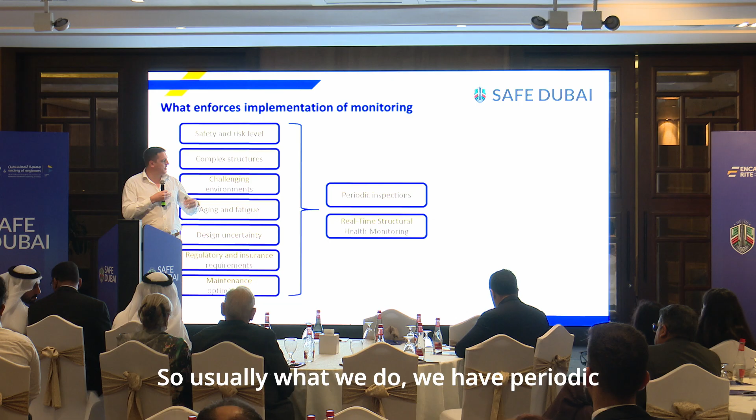So usually what we do: we have periodic inspection and we have structural health monitoring. Periodic inspection is when we send an inspector, an expert goes there, checks how the building is, and makes a conclusion. Structural health monitoring is when we monitor through all of today's technology and create a massive quantity of data. Now, what is the positive and negative side of all of this?

When it comes to periodic inspection, where we send engineers to see what's going on, the problem is that it's just a snapshot in the lifetime of a building. It's just one moment that we recorded. We do not know what happens with the building the rest of the time.

Second, we rely on the knowledge of the inspector, his skills, his ability to say okay, there is something wrong. For example, I don't know if you followed the case in Italy - in 2018 there was a bridge that collapsed. It had only been inspected 2 months before that, and was found fine. It wasn't.

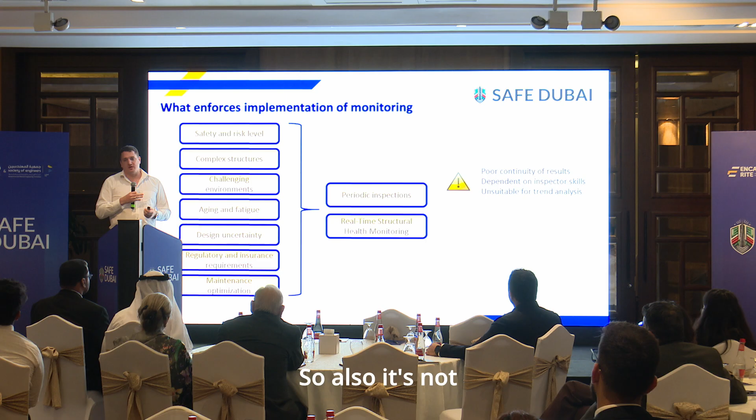Also, it's not suitable for trend analysis. You don't see how the building trends if you only have inspectors visiting from time to time.

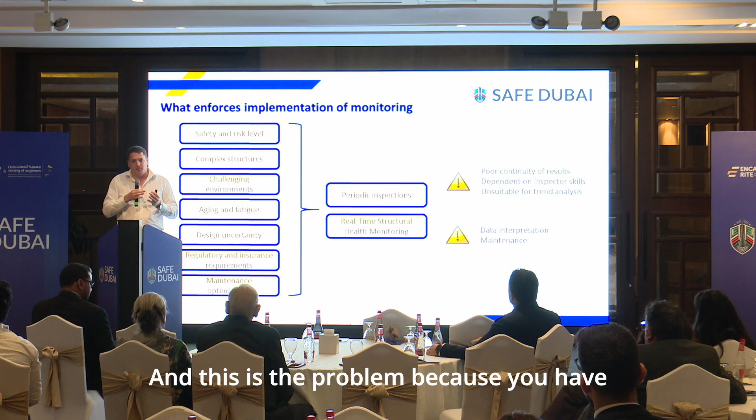On the other side, structural health monitoring has the issue of data interpretation, because opposite to periodic inspection, technology bombards you with information, a huge amount of information. And this is the problem, because you have to use other tools now to make sense out of this information. Also, maintenance, which with technology progress is now a reducing concern - we can say the maintenance is minimal.

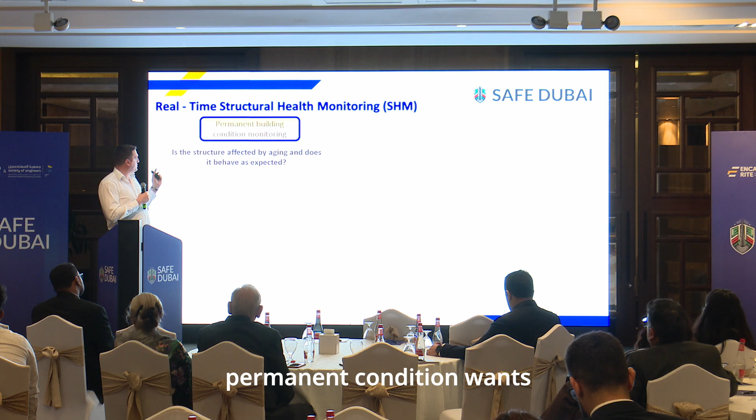So the monitoring of the permanent condition, building in permanent condition, wants to answer a question: is the structure affected by aging, and does it behave as expected? And that's what we usually use monitoring for.

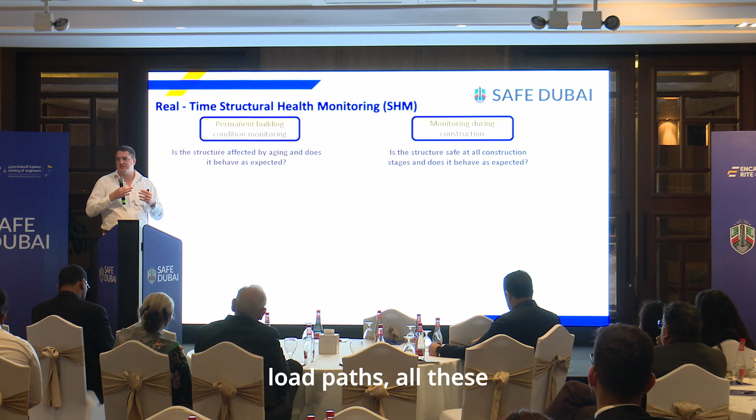But a less known use of monitoring is during construction, which aims to answer: is the structure safe at all construction stages, and does it behave as expected? This is way more complicated than monitoring the structure in a final stage, because a structure in final stage has only one behavior. During construction, it changes shapes, load paths, all these static systems, and so on.

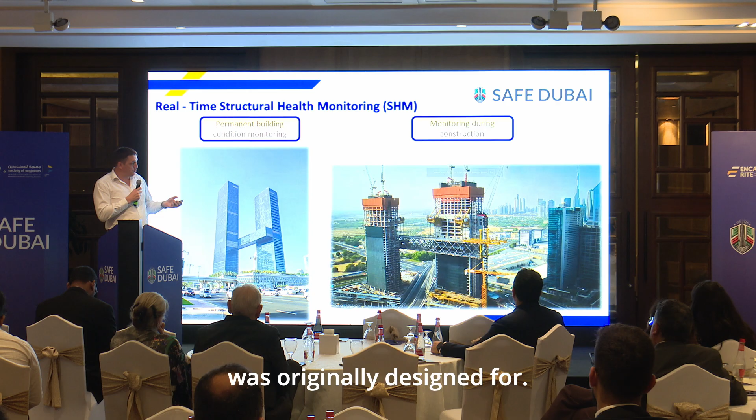All of that is completely different than whatever this building was originally designed for. And in order to make sure that in every stage of construction this building is actually safe, we need to monitor this building, and we need to know that it's behaving the way we actually want it to behave.

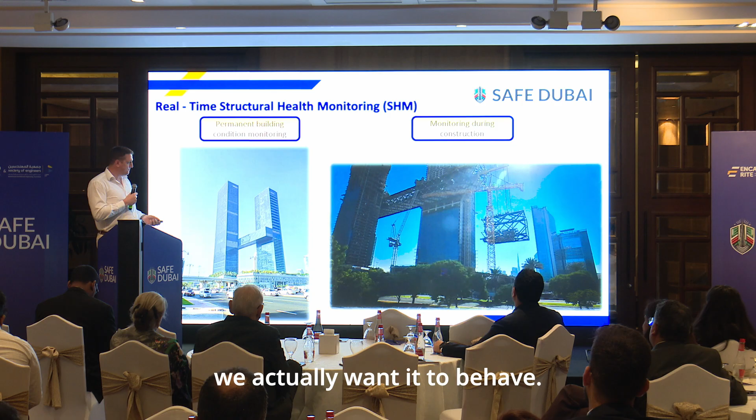Now, to give you a little bit of context, we need to get really into the specifics of this project. So One Za'abeel is located in the Za'abeel area, and it's practically surrounded by very important buildings in Dubai, including the palace in the proximity.

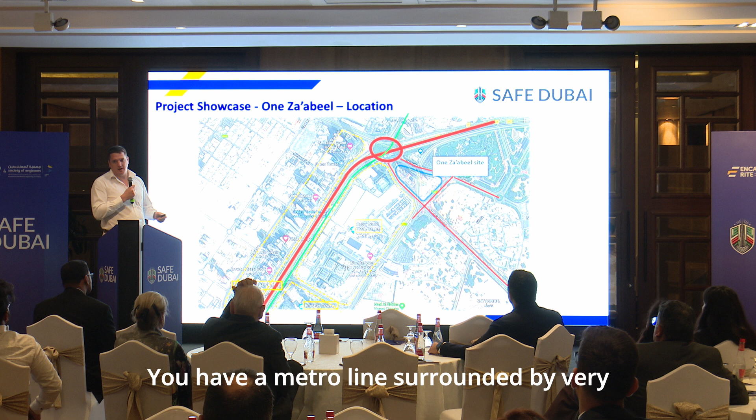When it comes to infrastructure, we have a main highway roundabout that takes, as of 2020 information, 650,000 cars a day. You have a metro line surrounded by very important streets, but the worst thing is it has a highway going through it. And this highway has to be operational throughout the construction period.

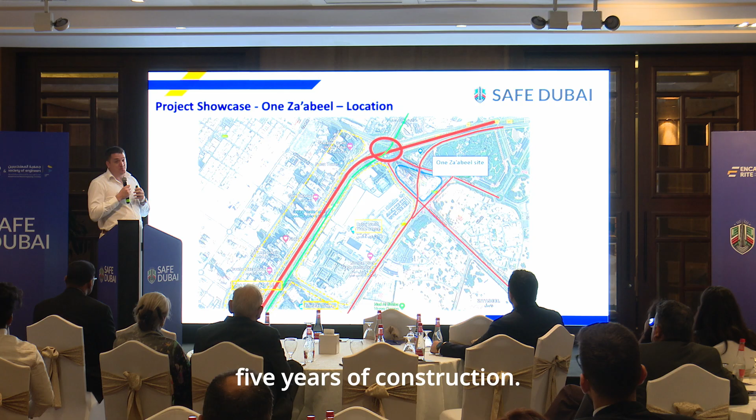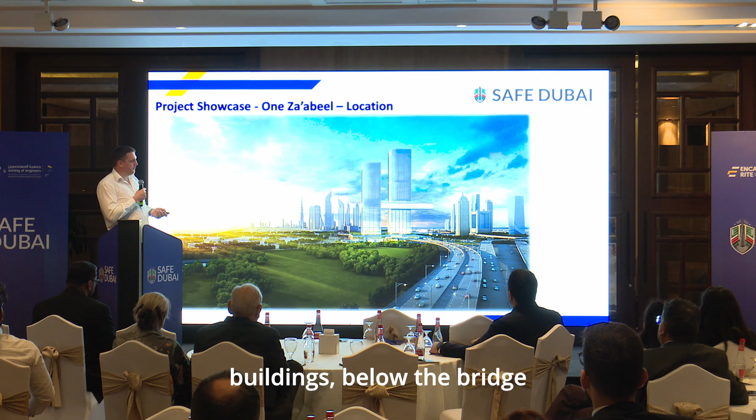In fact, the traffic on that highway was interrupted only for 3 days out of 5 years of construction. And that's a major achievement. Now you can see here that the highway goes in between the buildings, below the bridge that was lifted. So, a very, very challenging project.

Just to give you a feeling, Tower A is 300 meters, Tower B is 235 meters. The bridge is 225 meters. So the bridge is essentially another tower, just built horizontally. And the bridge's final weight is nearly 10,000 tons of only steel structure.

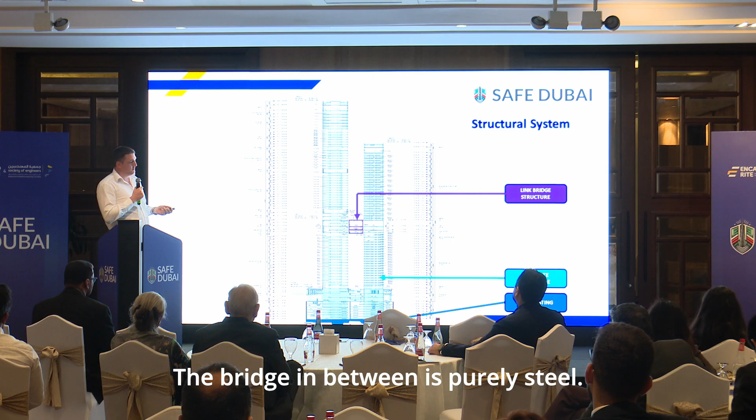No concrete, no facade, nothing, just the steel. So why is the structure so complex? I can show you here. We have a massive raft at the bottom, 3.8 meters thick down to 2.8 meters thick. The towers, obviously, and the podiums are made of concrete. But the bridge in between is purely steel, and very heavy steel.

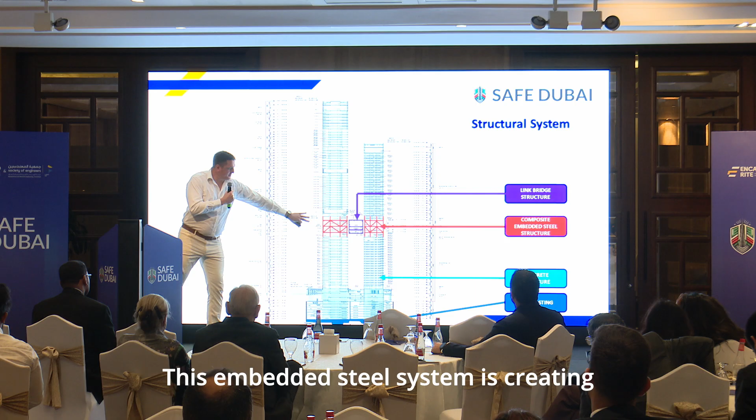We use so-called jumbo sections, so the thickness of the flanges of our profiles is 150 millimeters, which is the maximum. Then this bridge transfers the loads into the tower through this embedded steel system. This embedded steel system is creating a locally composite structure in the tower.

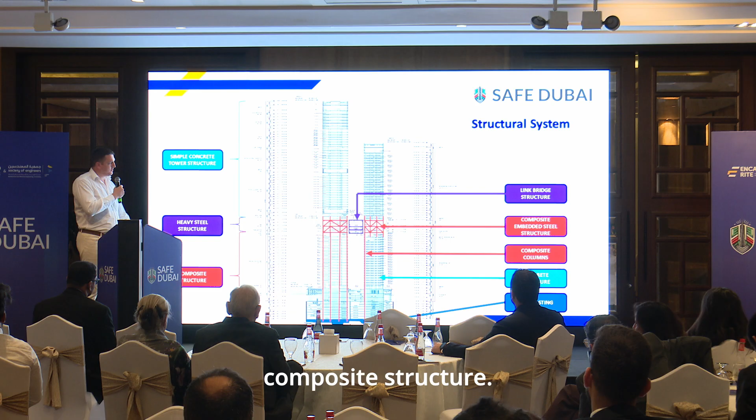And then, through a set of composite columns, it transfers this back to the raft. So if we look at this structure, you can actually see that you have a simple concrete structure that sits on top of a heavy steel structure that sits on top of the composite structure. So this immediately tells an engineer that this building behaves very weird, very strange. So nothing here is actually simple and predictable.

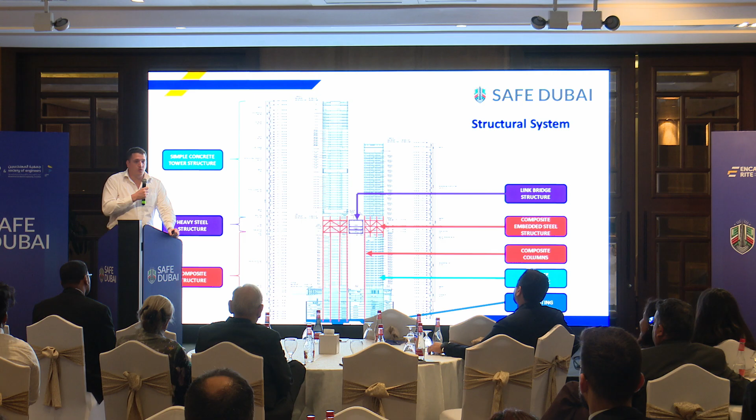We essentially had, and this is one of the things, on this project we had Nikken Sekkei from Japan as engineer, we had WSP as supervision consultant, and we have ALEC as main contractor. And although we all have different contract interests as companies, when you encounter a project like this, you see all of these engineers sitting around the table and scratching their heads, saying, okay, we have to think about this.

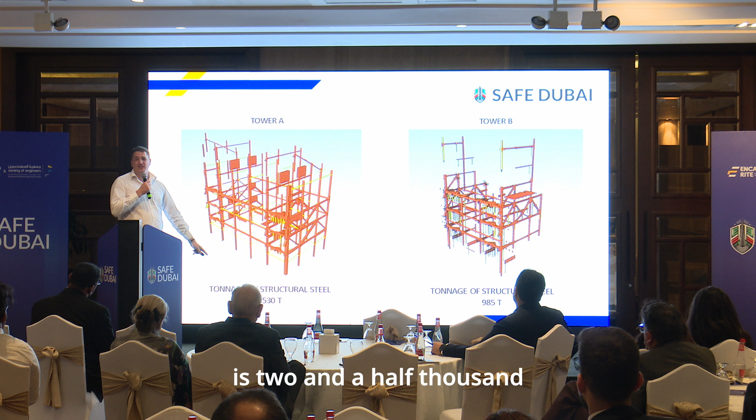Just again, to give you a feeling, the embedded steel in Tower A is 2,500 tons in only 3 floors of that tower. And another 1,000 tons in Tower B, only 3 floors, where the bridge is connected. This is how the 3D of the rebar and the embedded steel looks like, and this is all T40s.

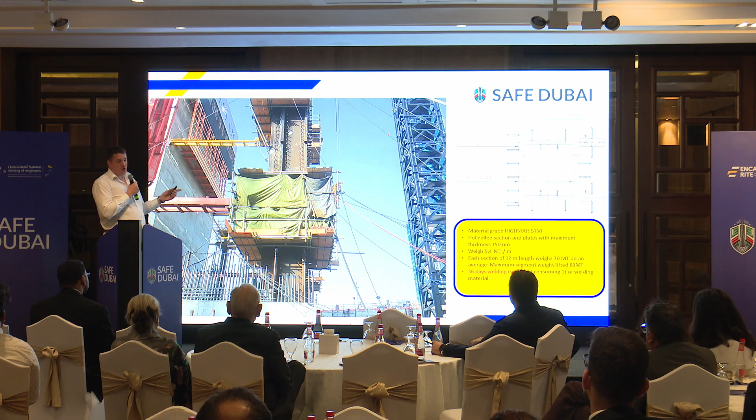This column, for example, is 5.4 tons per meter length of the column. It takes 36 days to weld these two parts of the column together. It takes 1 ton of electrodes to do it. So, very, very impressive stuff.

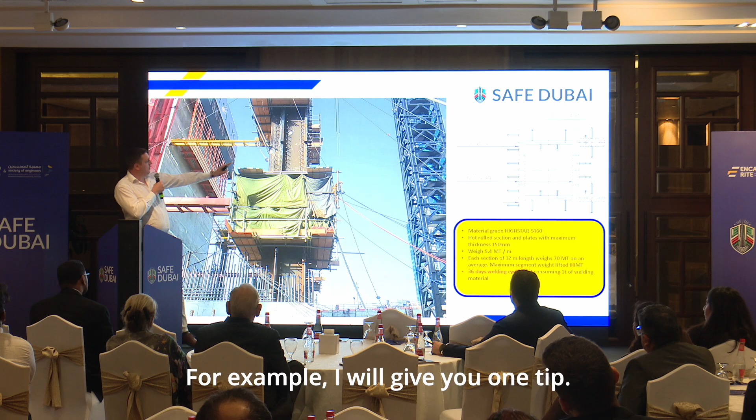And for example, I'll give you one tip. This column, due to the solar gain at the tip, moves 40 millimeters daily. It moves left and right, and there is nothing that can restrain it because it's so strong.

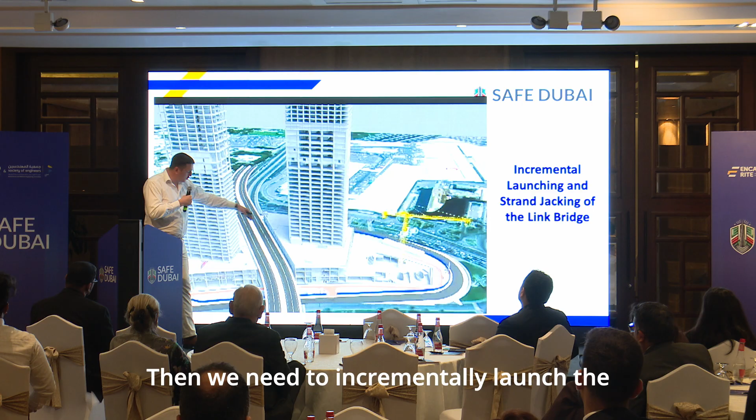So before I start the video, the highway cannot be closed. So that means we cannot construct over the highway. We need to construct everything on one plot. Then we need to incrementally launch the bridge until it goes over the highway. And when the bridge is completed, we will lift the bridge.

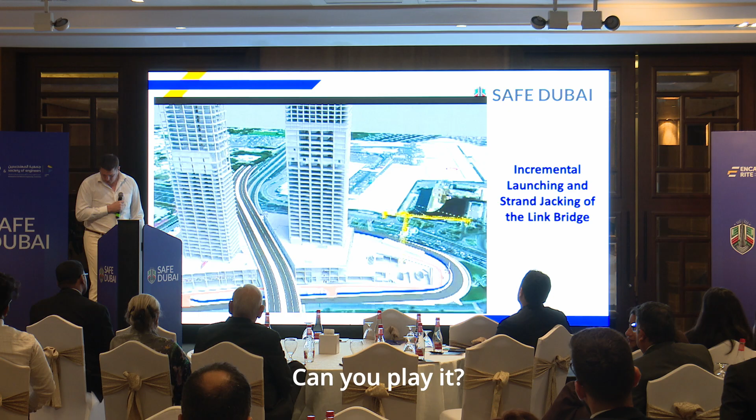So this is the temporary structure on which we will build the bridge, and the bridge is built in segments and then slide it. Now you can clearly see that the bridge, designed to be supported differently, is becoming a cantilever, a very big cantilever above the road.

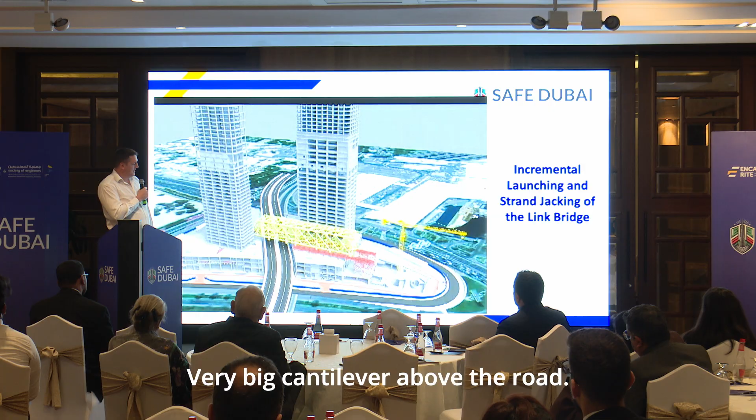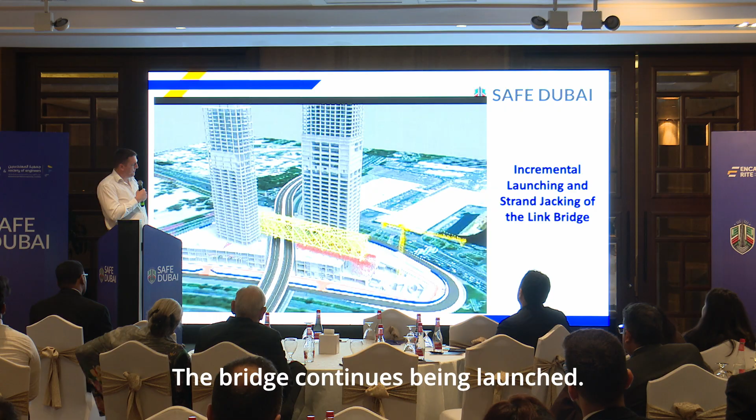And as we slide, we add new segments of the bridge which act as a counterweight to hold this cantilever. The bridge continues being launched. We then remove the nose, which is the temporary structure.

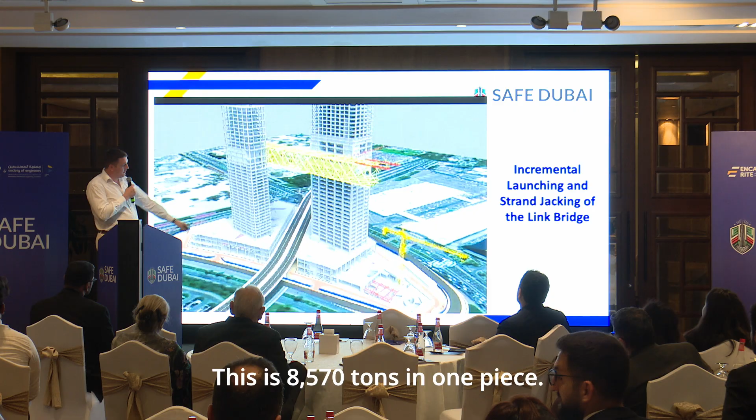When the bridge is nearly completed, we install gantries on these towers, and then we install gantries for the rest of the bridge to be lifted at the end. Then this whole thing is lifted up, 8,570 tons in one piece. Then we assemble the last piece of the bridge, and then we strand jack that upwards.

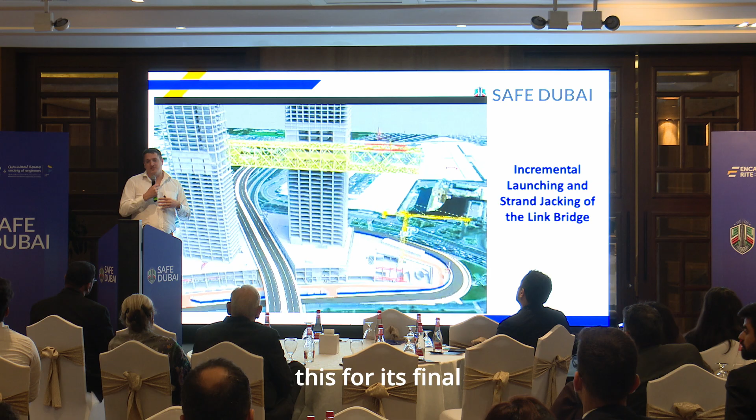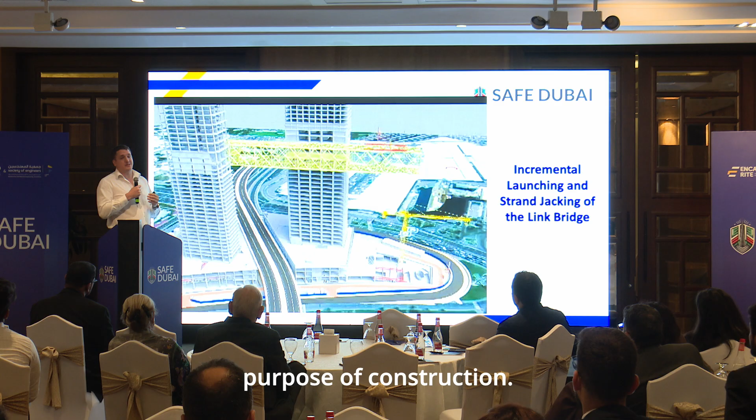So from this video it's very clear that this structure goes through incredible cycles and completely different stages compared to what the structure is originally made for. And obviously, when the engineer designed this for its final stage, he doesn't think about temporary stages. So it's very, very hard later on to make the structure fit for the purpose of construction. And that's why we need to monitor this life cycle.

This video, I think, will show you now how this looks in real life in Dubai. You can clearly see, so this road is operational. Luckily it's not a congested road, but the bridge was slided, and this was the moment when everyone was asking, what are you guys doing? Why is this bridge 45 meters cantilevered over a live highway? They were surprised that you can actually drive below it, and it's hanging in the air.

So eventually the bridge was completely connected, so in this stage you can see now it's a continuously supported beam above the bridge. Very, very interesting effects of this launching.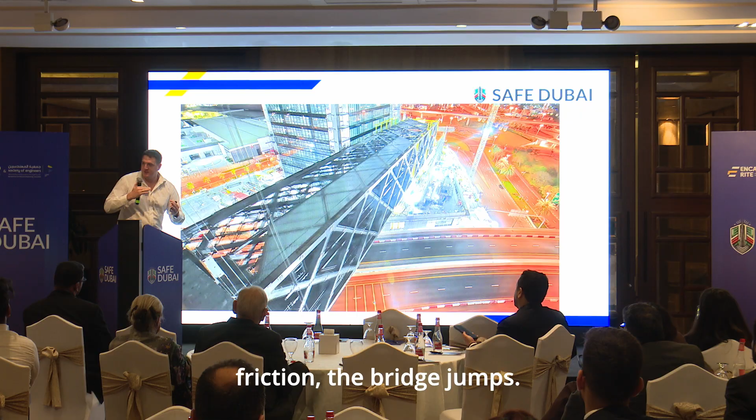For example, when we are launching the bridge, you will see that the forces in the jacks rise, and then when we break the static friction, the bridge jumps and it goes 300, 400 millimeters, then it stops again. And then again the force rises, and it goes like that. And then as soon as you think, okay, I learned something about this, this is how it's going to behave, the bridge touches the other side and starts behaving differently.

Now these two structures start working as springs between themselves. So if the bridge slides on one structure, it pushes the other structure. All of this, we had to see the effects of all of this.

So this is the video of lifting the bridge now. The lifting of the bridge is again a completely different stage. It's a completely different project to sliding. Can you play this?

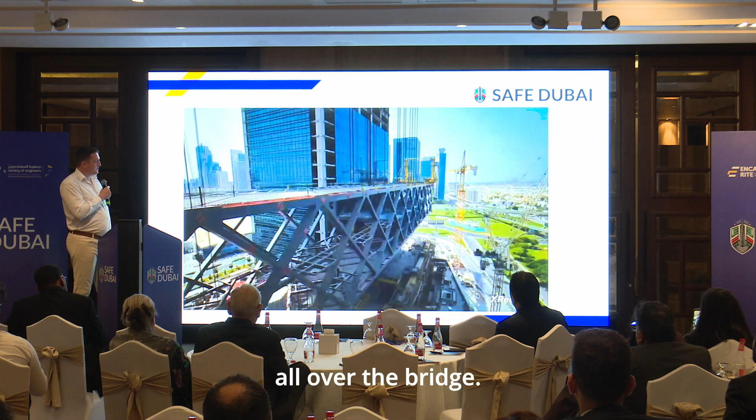So you can actually see how many monitoring points are all over the bridge. The bridge was lifted over 2.5 days. The first 10 centimeters took 24 hours, and that was very interesting with authorities because it was a challenge to explain why you need 24 hours for 10 centimeters, but you are promising 2 days to complete the rest.

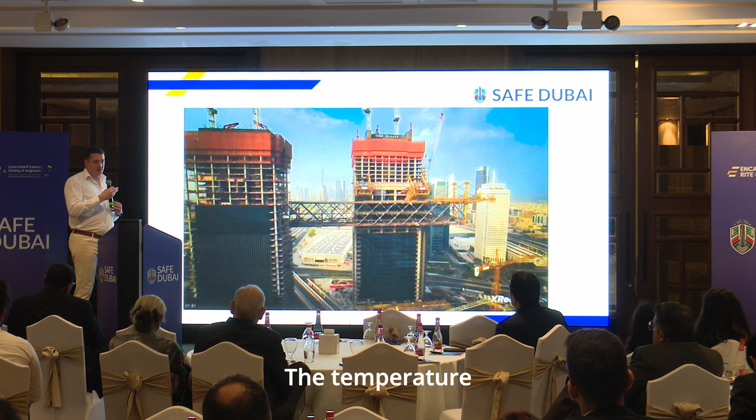Because when you do strand jacking of such a structure, if anything is going to go wrong, it's going to go wrong in the first 10 centimeters. And that's where we play with forces, with deflections. The temperature changes in UAE drastically, so all of your data collected has to be tuned to accommodate for the temperature change, and so on.

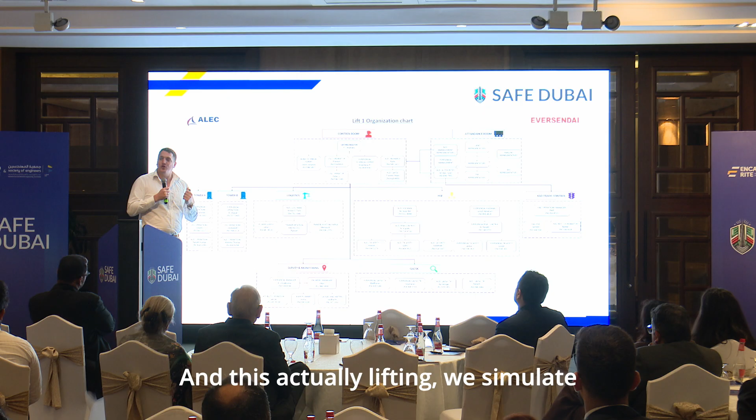Eventually, what I would like to explain is how do we perform these so complex activities, and where does monitoring sit in this? So this is an organization chart of a lift, and this shows you how the team functions. And this actual lifting, we simulate 2 or 3 times before we actually lift.

We do fake lifting, so we have a control room in which experts sit. The main guy is called the lifting master. This person makes a call. He communicates with all the teams based on the information issued by engineers.

In those teams, we have technicians operating the jacks, people that actually control the jacks. We have engineers from different fields analyzing the information collected through the monitoring devices and monitoring teams, and then they make a decision. Now I want to tell you one interesting thing, a detail that is very important.

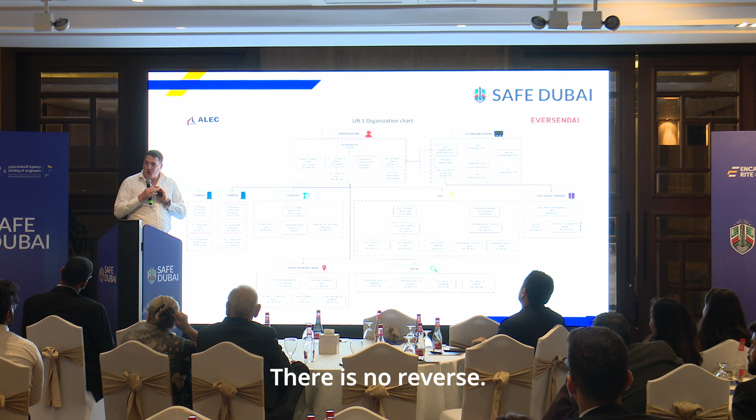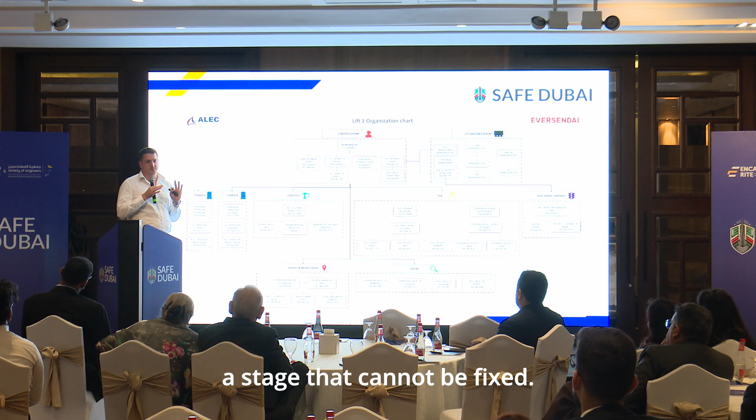The bridge, once lifted, cannot be lowered down. There is no reverse. It can only go up. So if there is something going wrong, you have to stop it on time, or it could go into a stage that cannot be fixed. Very dangerous, a horrible thing to do, frankly speaking.

And you heavily rely on your eyes and ears, and those are monitoring devices. You heavily rely on them. Some of them have to be very traditional, very simple. Some of them have to be technologically advanced, but eventually they all need to sync, and they all need to talk the same language and show the same results. And that's why sometimes, to measure the same parameter, we rely on a number of monitoring systems.

So if we look at this chart, you will see that we have A and B operators, the people that operate the devices, and we have a logistics team. Electricity supply is extremely important, these machines consume a huge amount of electricity. Health and safety, these are the emergency people that take action if something goes wrong. We have traffic control, people ready to stop the highways if something goes wrong.

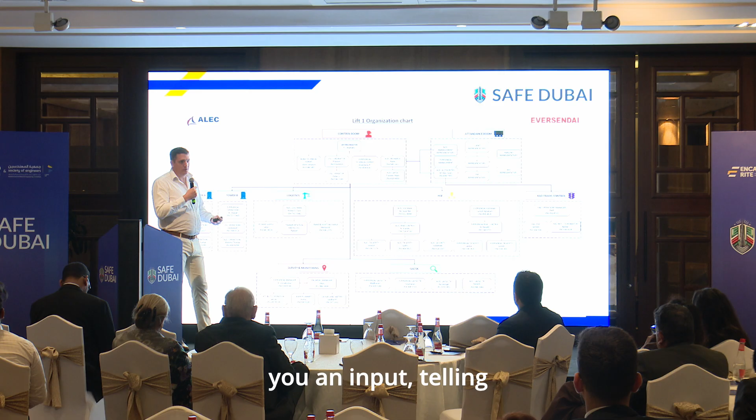But most importantly, we have these two teams: survey and monitoring, which gives you input telling you what's going on with your structure, and the QA/QC people, those experts we showed in the beginning, who actually go to the location and check with their expertise how the structure is doing.

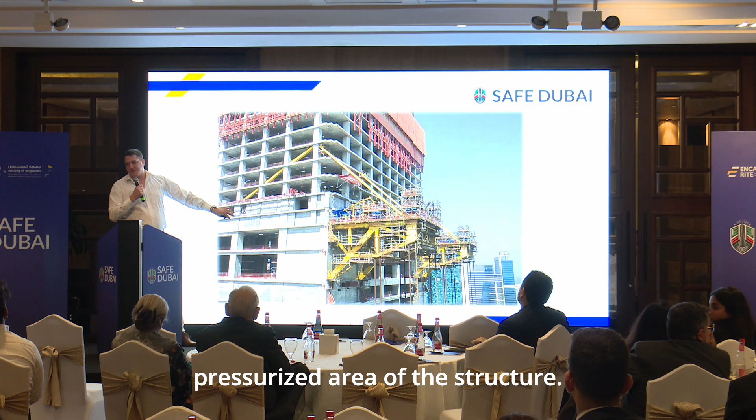Also, you can see the bridge is connected at this level and below. So these gantries are built on the part of the structure that is not meant to take the forces from the bridge. So this is an extremely strained, extremely pressurized area of the structure. This is where the structure suffers the most.

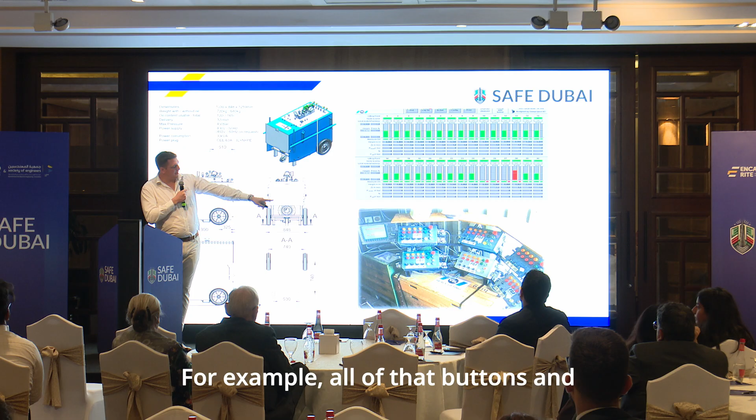Now, this is how the control room looks like. For example, all of those buttons and lights are actually related to each jack lifting. We have 24 jacks lifting the bridge. So each jack can be operated, and it has to be operated in real time.

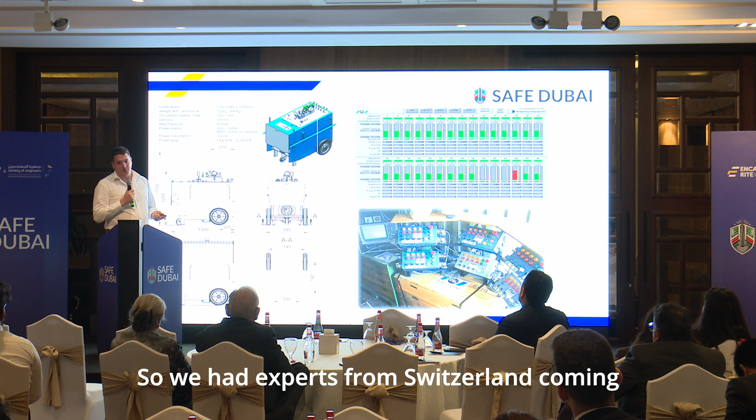So you need to read your monitoring information on the screen and turn jacks on and off as required, 24 of them. So we had experts from Switzerland coming to actually operate this, because usually they don't use this many jacks. 24 jacks is a really large number to be used simultaneously.

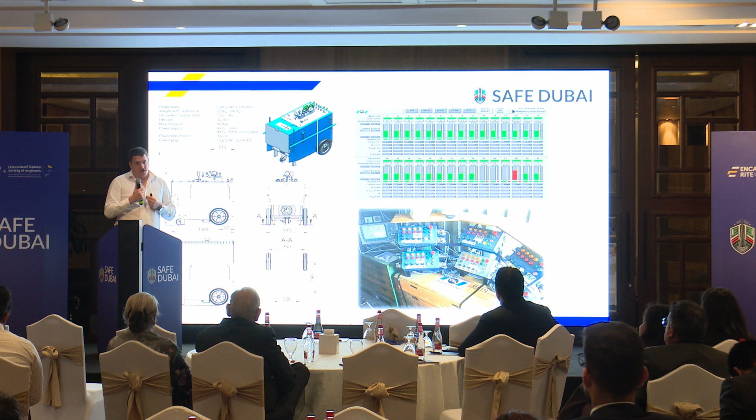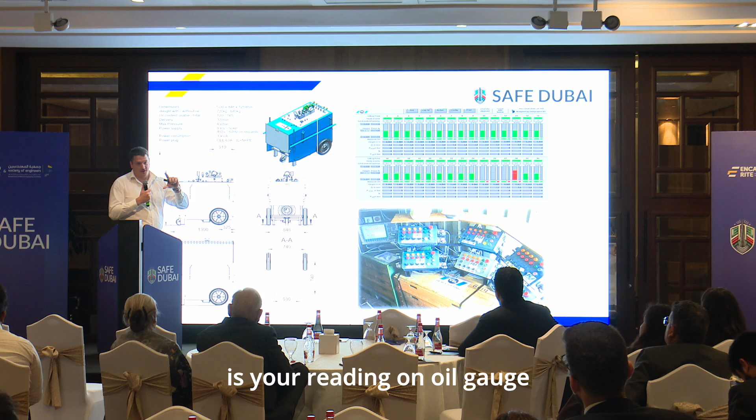We also managed to integrate their monitoring devices into our system. They monitor two things: oil pressure and laser distance. They have a gauge in a jack that measures the oil pressure, which is translated into the force applied. But because these gauges can malfunction, they also have a laser beam between two points on the cable, always measuring the distance and telling you whether your oil gauge reading is actually right.

What happens if you have a jack that is lifting more than his other friends? He attracts more force and can cause local failure. This has to be avoided.

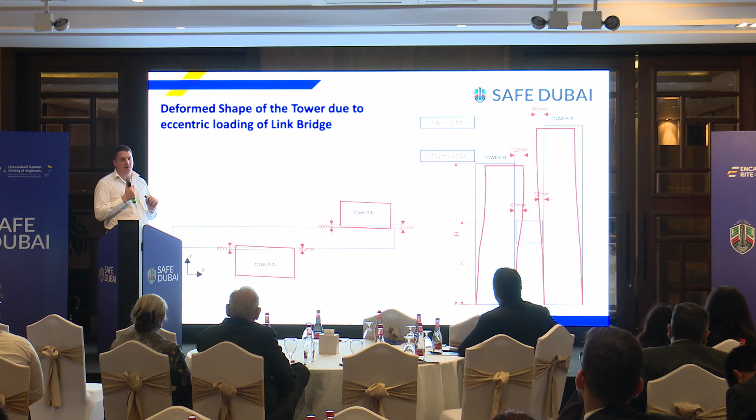So after some studies, we came to an amazing conclusion that the towers will actually move a lot. What you see here means that not a single elevator can be installed in this building. 78 elevators will be completely dysfunctional. Tolerance of an elevator shaft is 30 milli. We are everywhere from 35 up to 100 plus.

What do you do with this building now? How do you deal with this kind of thing? Once we lift the bridge, it's obvious both buildings will lean toward the bridge because it's 10,000 tons. What do we do? We build a tower that is not straight. And as far as I know, this was never done before.

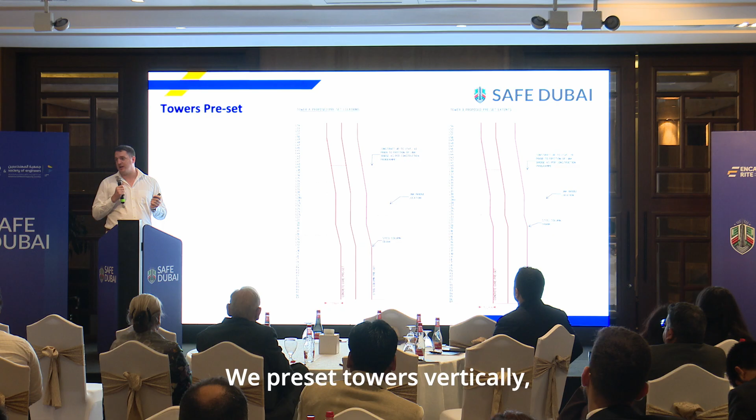So we literally built towers that are leaning outwards. We preset towers vertically, hoping they will come back, because no one ever did this. We contacted people from universities all around the world, we had experts, and no one had ever done this.

And you know, when you run these simulation models like SAP 2000 or ETABS or whatsoever, this is all theory, especially when we know that the pre-camber calculated by an engineer is nearly never accurate. So now you have to pre-camber, or actually preset, the entire tower, hoping this is going to come back.

So we had some resistance from traditional engineers saying, are you crazy? We have thousands of cubic meters of concrete per floor, and you think this is going to move? Not possible. Yet there was no mathematical proof from any kind of analysis showing that the towers will not move. So we had to preset, and we did.

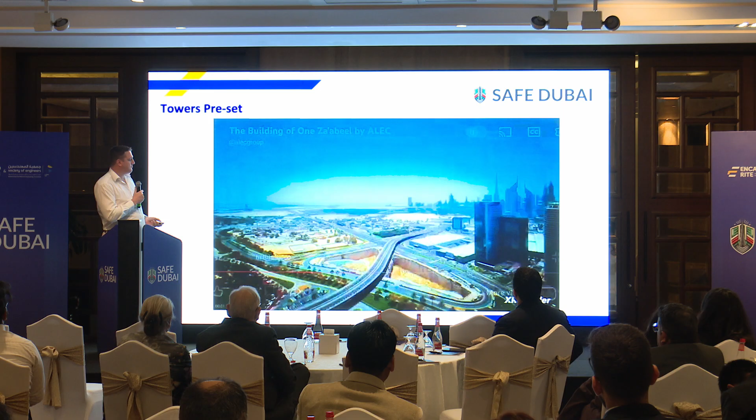So what this means, we actually, when we built the... you can play this video, please. Can you play the video? So when we build the towers, they will be built outwards, leaning outwards.

We'll lift the bridge, and the towers will come back. Then we will connect the bridge, and the further construction of this tower also has to be outwards, because as you keep adding load, the towers keep leaning toward the bridge. And this was really tough analysis, really tough.

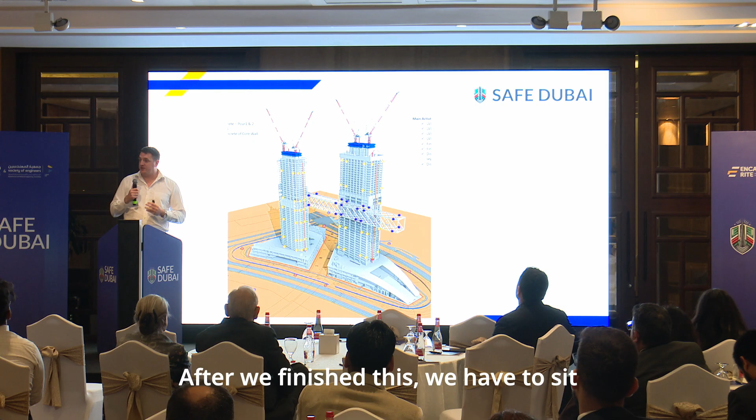After we finished this, we had to sit with an engineer, or actually a number of engineers, and decide what parameters to monitor. What monitoring information we want to receive, but above that also what frequency and what method. All three of these were very crucial.

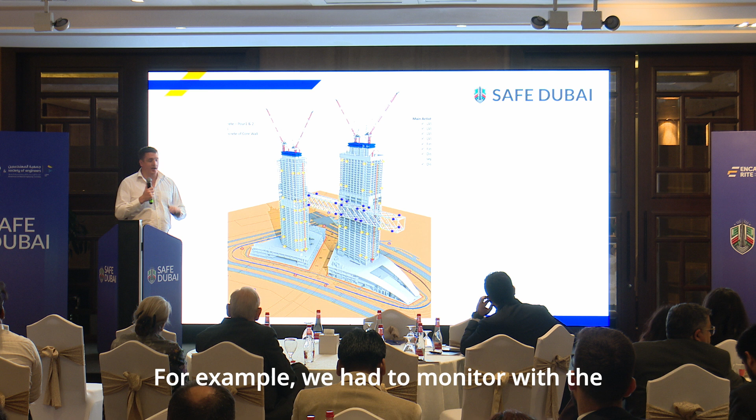For example, we had to monitor certain points on the tower with a theodolite. I know that today technology tells you, oh my God, you have point cloud, you have point cloud, you can make a trillion points per day.

Why don't you use that? Try to analyze a trillion points in 5 minutes - not possible, the information you need to analyze is too much. So sometimes a method that is a little bit more traditional gives you more clarity.

Engineers generally like to remove white noise from their thinking. They like to think simple.

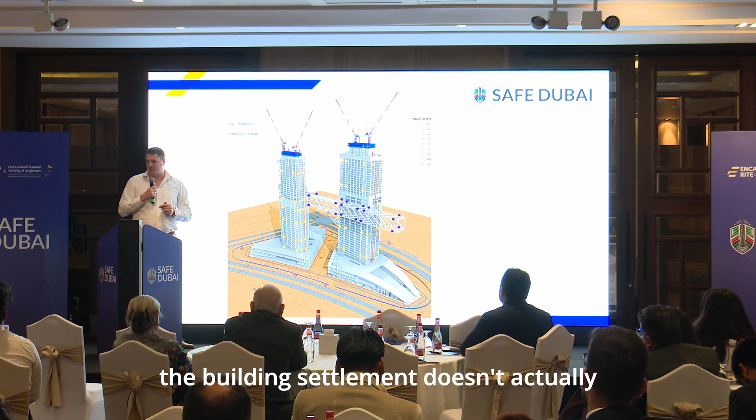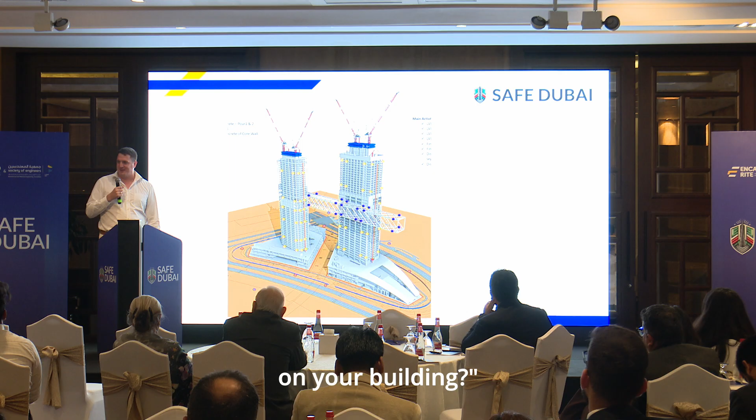So we had devices placed around the building, sufficiently far that the building settlement doesn't impact the performance of these measurements. Because if your theodolites are close enough, when you lift, the theodolite base itself will be moved. So we had to go into other people's houses, plots owned by RTA or Etisalat, and all these important buildings around Za'abeel, and ask them, can we please put something on your building? And they're like, what do you want to put something on my building for? So it was very interesting from that point of view as well.

Now you can see how those were actually operated. Everything was automatized. So every 5 minutes, every 3 minutes, the theodolites will read around 300 points and send the information to a server automatically. Apart from the theodolites, we have strain gauges, tilt meters, and all sorts of equipment sending information at regular intervals during the lifting of the bridge.

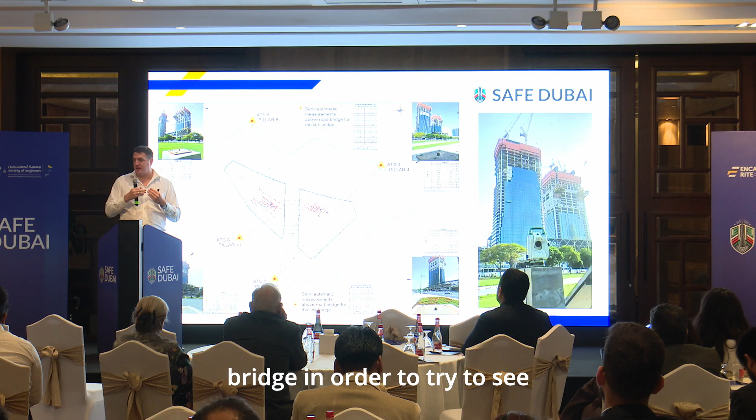We obviously ran these systems even before lifting the bridge, in order to see the nature of the building - how it behaves during different times of the year, how it behaves when it's very humid, and so on. So in essence, we performed monitoring from all sides.

I will now go to the methods that we actually used. So, strain gauges - we had strain gauges fixed on a number of steel members. We had a system of monitoring prisms placed on the bridge and on the towers. During lifting, before lifting, and after lifting, all of that was monitored.

We also had embedded strain gauges in the concrete, trying to see how the concrete structure behaves during these temporary stages. Because remember, concrete is not designed to do this - concrete was designed to be at the final stage.

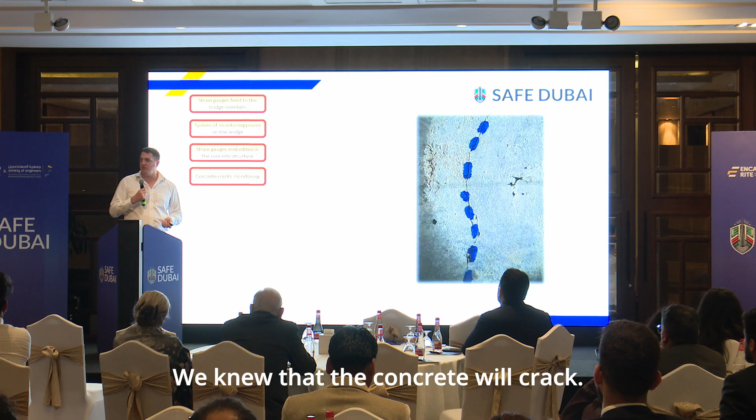Then we had concrete crack monitoring. We knew that the concrete will crack, we knew that we will have elastic deformation of the rebar within the building, and we knew once we welded the bridge and released it, the cracks will close. This is theoretical knowledge - in order to know if it's really like that, you need to monitor. When we monitored, it was like that - all the cracks that appeared during lifting actually just closed at the end.

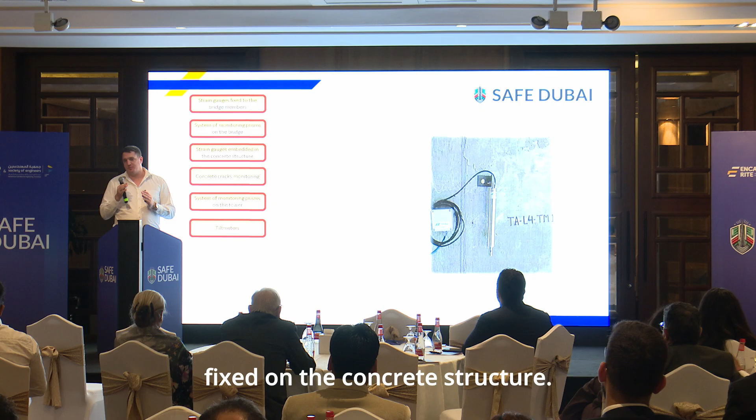We used a number of prisms fixed on the concrete structure as well. We used tilt meters - why tilt meters? Because the building will change angle.

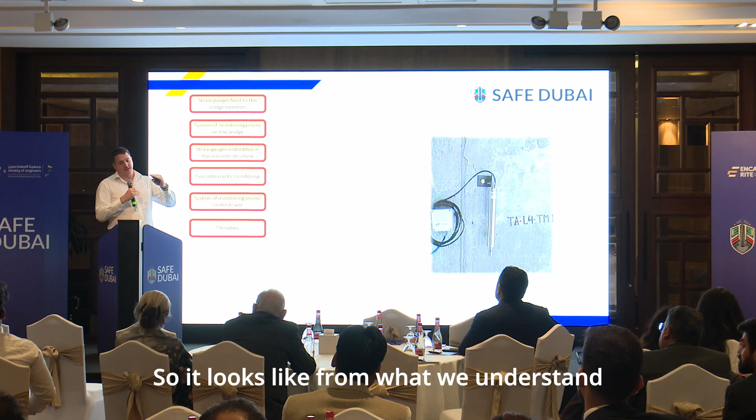And this was one of the first things everyone asked - did the building actually move? Interestingly enough, the building didn't move as designed initially - it moved only like 70%, maybe. But then, when it went through 2 temperature cycles, meaning 2 days, the building actually reached the position. So it looks like, from what we understand on that project at least, this temperature cycle of cooling and heating gets the building where the engineer calculated it would eventually be.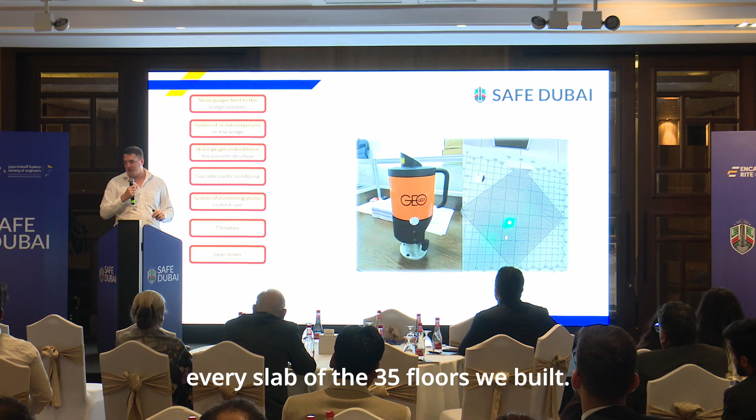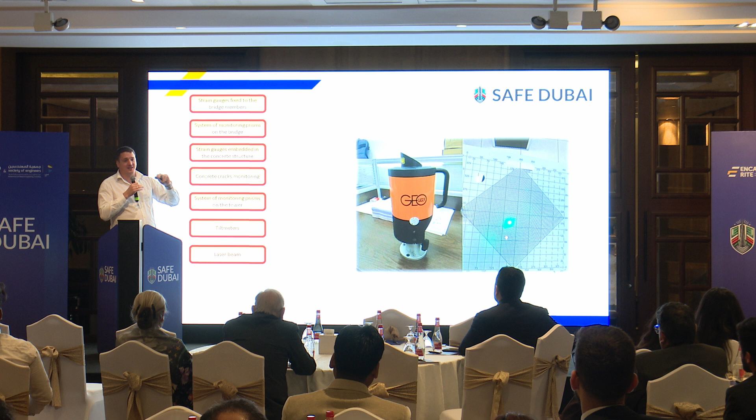Then we used laser beams - an extremely simple and extremely useful method. What we had was fixed to the raft, a laser that shoots up. In every slab of the 35 floors we built, we left an opening. Milky glass is fixed to the opening, and you can see in real-time how the building moves as you lift. Very simple method, yet very, very successful.

And obviously we had oil pressure gauges in the jacks to see the force applied, and thermal sensors in order to adjust the results.

All of this gave us input - for example, the bridge internal forces. We had to know how this bridge behaves when we are lifting it, and its deflection, by using the prisms. Now, if you pay attention, you'll see that what's more important is the information you want to get - more systems are used to actually gain the knowledge.

Dynamic forces due to the incremental launching - we used forces applied by jacks and internal forces distribution. We used the jack pressure gauges. Temperature during the launching, during lifting - very important information.

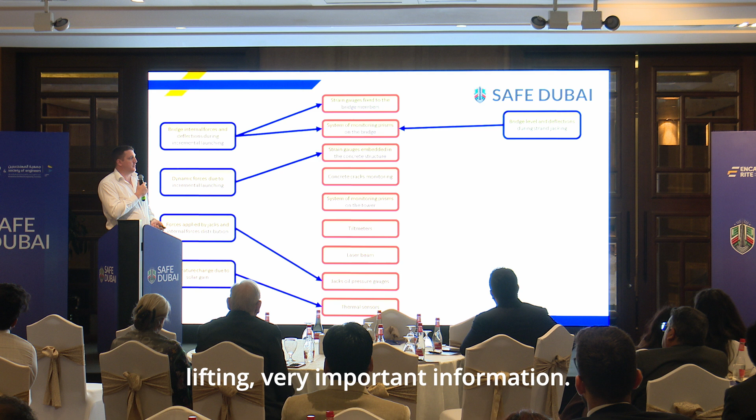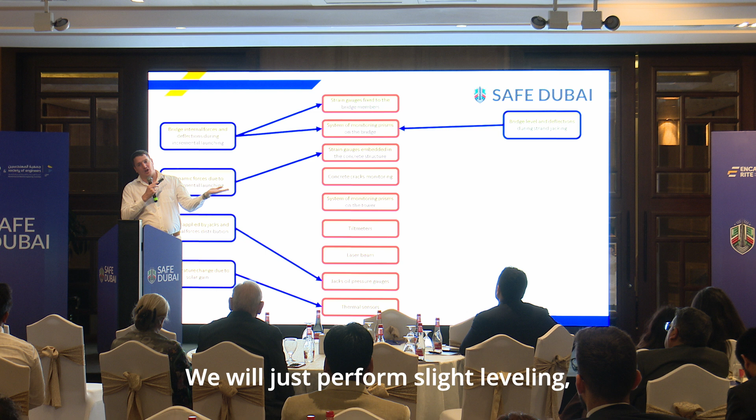Bridge level and deflection during the strand jacking - when you lift, how do you make sure the bridge isn't going this way or that way? You have to monitor this all the time and level it. So when we perform a lift, we perform 5 strokes of 500 millimeters, then we do the leveling. We survey the whole bridge, and we'll say the left side of the bridge is 5 milli down. We just perform slight leveling, lock the jacks, and continue lifting.

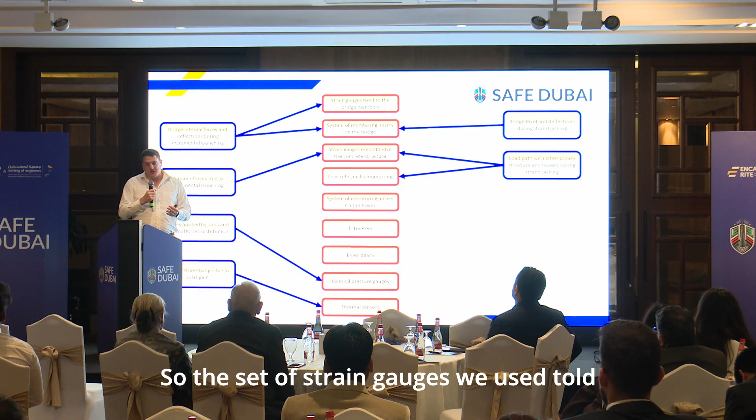Load path within the temporary structure and tower during the strand jacking is the most challenging thing, because the load in a tower not made for a temporary stage could go anywhere. The engineer believes it will go in a certain path, but it could actually go anywhere. So the set of strain gauges we used told us in real time how this works, where the force is traveling, and are we overstressing something. Concrete crack progression is also monitored throughout.

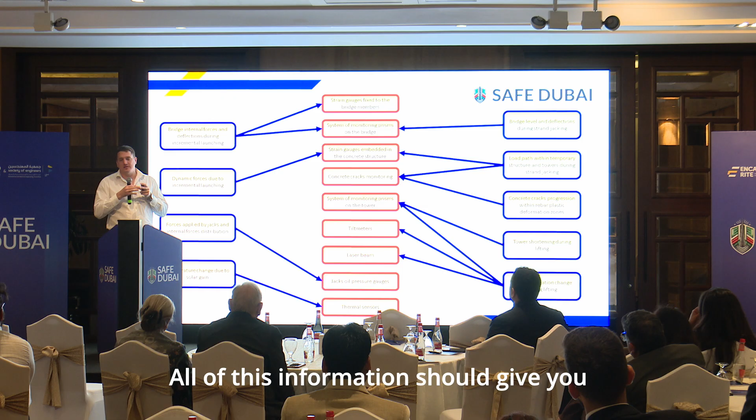Tower shortening was also monitored; the towers shortened down 20 milli. Then there's tower inclination change during the lifting. Since this is one of the most important parameters, we use 3 different systems. All of this information should give you more or less similar results. They cannot be perfectly equal, but similar.

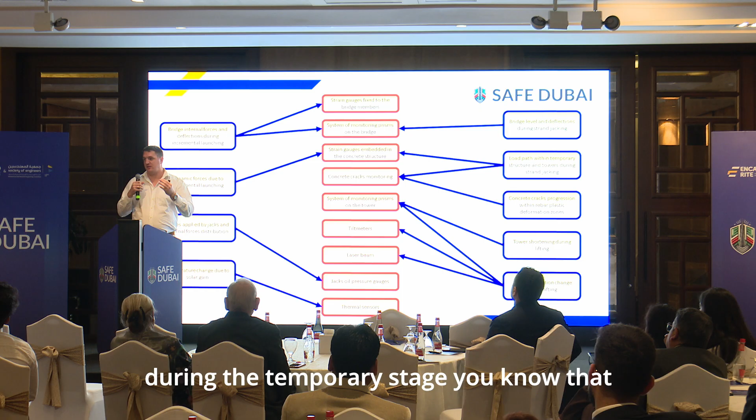What engineers actually look at when it comes to monitoring results is more whether it makes sense and is in the magnitude it should be, rather than whether it's perfectly accurate. For example, if you have 8 columns on the side of the tower, during the temporary stage you know the first and last column will attract 20%, and the rest, 80%, will be in the central columns. When you look at the monitoring results, you might have a different level of force, but that relationship between the columns should be the same. You should not have 80% going to the external columns and 20% in the center. This is what they are looking at.

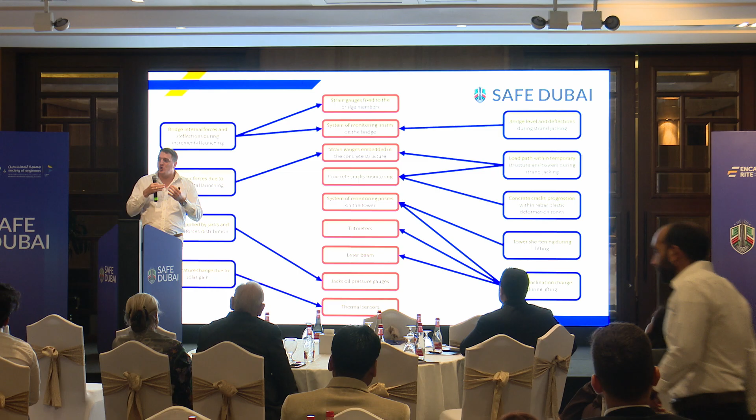As long as the building behaves in the way they predicted, it's okay, even though the forces might not be exactly the same.

Now, when you collect all of this, you get this. Horrible—try to make a decision on this. Nothing. You don't get one, you get thousands of them. Hundreds if you want, thousands, millions. But nothing that actually tells you what is going on.

It's just raw data. So we sat with Encardio again and said, okay, we have to develop software that actually makes sense out of this information. It makes the calculations for us that we did in our models, and it tells us, very simply, your tower moved 20 milli there—do you want it to go there? That software not only tells you that your tower did something, but also compares that to the stage you are in and what you were calculating initially for.

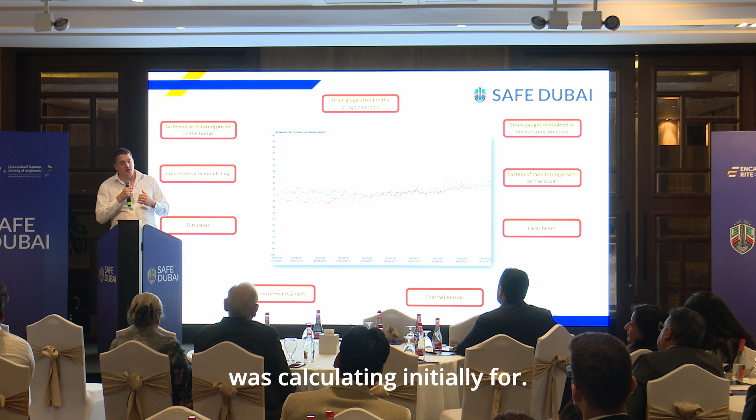So you said it will go 22 milli, it went 20, acceptable. You predicted it will go 22, it went 50, stop—there is a problem. And we did that. This is a software we developed together with Encardio called DNA.

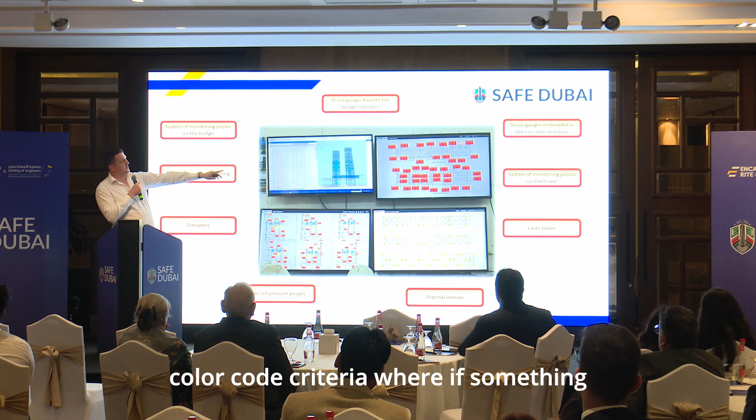This software, in real time, gives you hundreds of parameters, and it gives you a color code criteria, where if something turns red, it's not because the bridge is going to fall, it's just because we haven't started yet. But everything gets a red, green, or yellow code independently, showing whether you're approaching the border value, the limit you set.

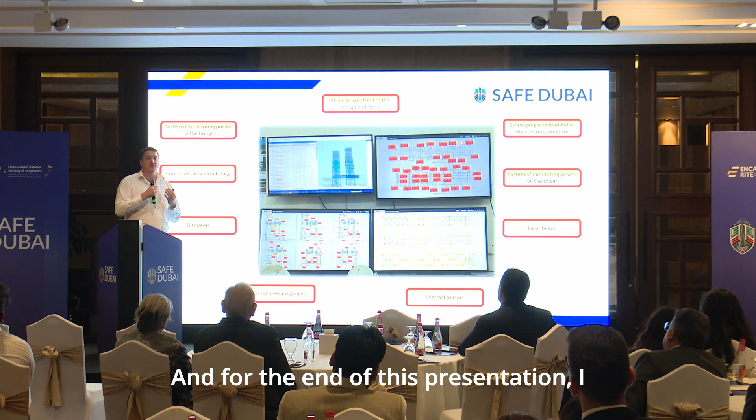For the end of this presentation, I will show you the video during the lifting—how we operate the jacks, how in real time 16 engineers work reading these results and making decisions while the structure actually moves. You can play the video.

You can clearly see here people operating and communicating on the radio. They have cameras looking at the bridge and the jacks live. As they operate the jacks, the camera turns around. You see here they also have their own criteria set, showing the values expected in the jacks, so they make sure nothing goes out of range.

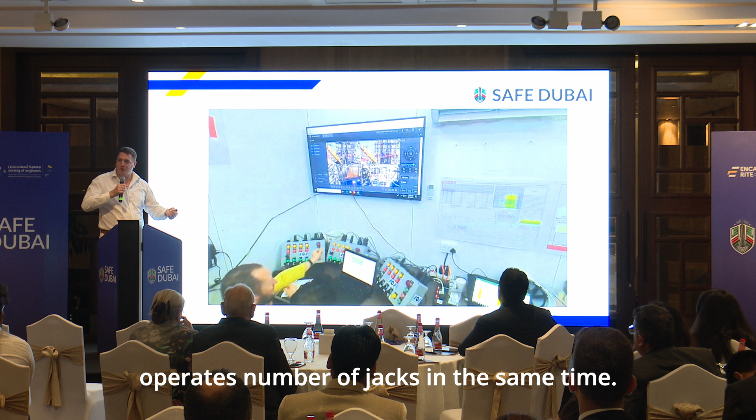On their computer, they have all the jack oil pressure and distances being monitored. You can see as he operates a number of jacks at the same time—turn off one, turn off the other one, start again. Okay, 45% now, so we go 50%. This is the monitoring team.

This is the team of engineers sitting and reading the information all the time on all the strand jacks, on all gantries, everything, and communicating back to the operators: we can proceed, or we have to stop.

So in order to achieve this, we had to sit together with so many experts to make this program, at the end, give sense to what we're doing and to make the right call—from steel people, strand jacking experts, Encardio as monitoring, us as main contractors, coordination with authorities. All of that was done thanks to this software.

I think the future of monitoring is not in refining the technology in terms of devices only, but essentially enabling people to simplify the huge amount of collected data into something very easy to understand and to make quick decisions. For us, luckily on that project, we managed to do that in a very short period of time—very intensive work, but we could make calls very quickly. Thank you, that's all from me.